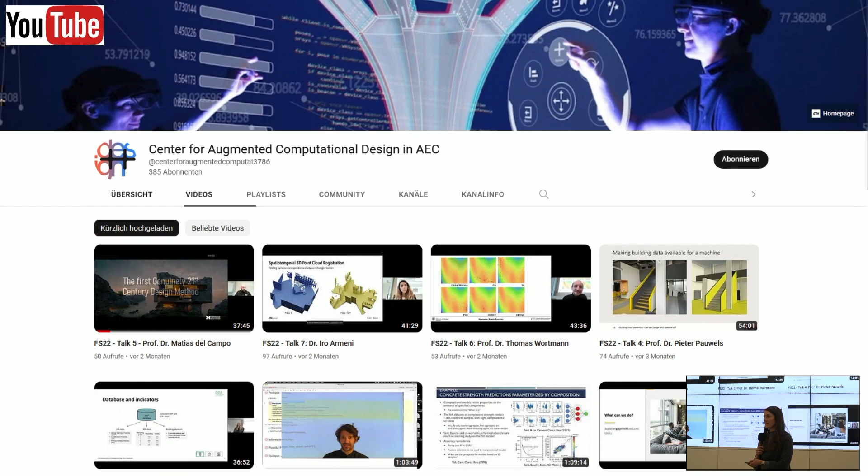There's many nice things to say about these two, but that's maybe not the point of today. The point of today is to introduce our seminar series, and we'll have 4 talks this semester. So we are trying to up the quality and reduce the quantity here. And if in the future you would like to see any of the past or upcoming talks, they will all be recorded and added to our YouTube channel, if it's okay with our speaker. So this is the team who puts together the speaker series. If you have ideas for an upcoming talk, a speaker, an idea, a theme, please let us know, and we're happy to add it. So with that, I will let Vera introduce our speaker today, Professor Eleni.

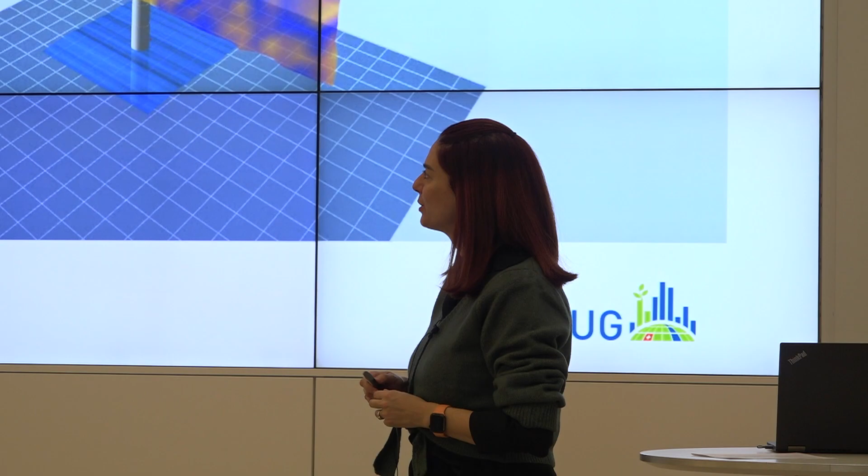Okay, so I would like to introduce a bit of what we do in the Chair of Structural Mechanics and Monitoring at ETH Zurich. I'm also a core faculty member of the ETH AI Center, so it's great that we have Vera joining the center soon with Stelian and Walter. And what I will show here is actually touching on the use of AI and ML methods, but in a way that is interpretable for the purpose of monitoring of engineered systems.

And because I will be discussing monitoring, I would also like to define the so-called concept of structural health monitoring, which is effectively a chain starting from acquisition of data, measured information from different types of engineered systems, for the purpose of diagnosis of their existing condition, or prognosis of their future performance. And a way in which this can be done in an interpretable fashion, and where we come in as a group, is essentially the use of simulation models that can take into account the underlying principles of dynamics, as I will show, but also physics.

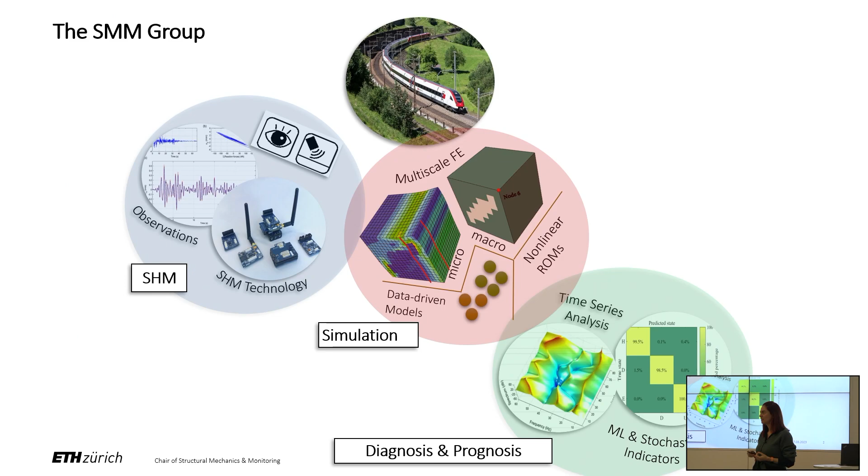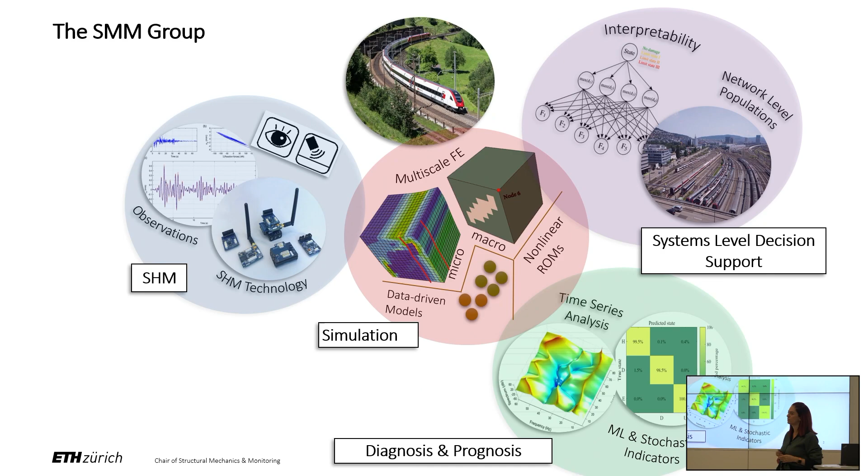And so we do this for assessment of engineered systems as entities, but the overarching goal is to be able to achieve this for the system level when we're discussing populations or fleets of systems, or, for example, components of the structural or infrastructural network of transportation, or wind farms, which is one of the assets that we are typically dealing with, where a decision has to be taken at the collective level.

Okay, so the types of systems that we deal with are not your typical civil engineering structures. Actually, it's also your typical civil engineering structures, but it's anything that can be considered an engineered system and on which we can install sensors and retrieve information. So we work with the Swiss Federal Railways, for example, for the use of onboard monitoring for extracting information on railway assets.

Let me see if the pointer works. Maybe not so good. I'll do it from here.

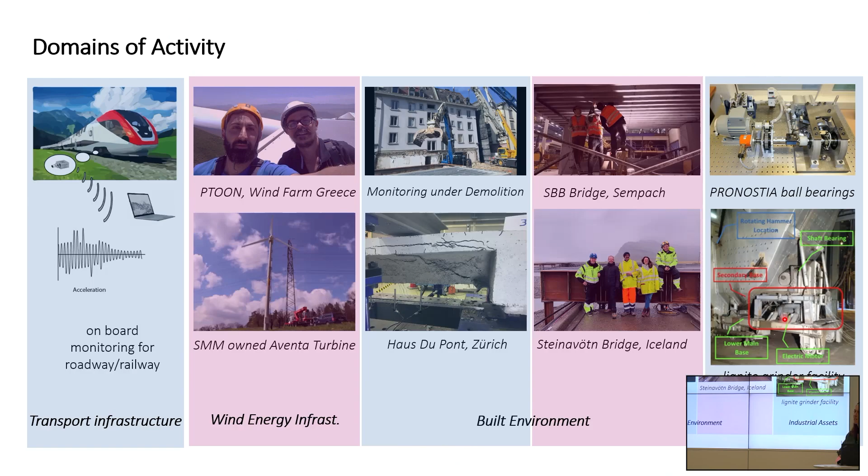And then we also have a number of activities in the domain of wind energy monitoring. I'll come to that in a bit. We do, let's say, more conventional civil structures, but also engineered systems that are actually industrial assets, bearings being one such example. Now, before I explain the use of monitoring in conjunction with models, I would like to explain, as many of you probably already know, what we can do by valorizing data, meaning data on its own.

And to show this, I will use an example from our activities on monitoring on wind farms, where, just to put it in perspective, a lot of information is typically available from so-called SCADA information. This is basically information on the operation of these wind turbine systems collected at the nacelle, which is the top of these turbines, and which can give some idea about the performance of the system and the collective image of what is going on at the farm level.

Now, the issue here is that you can probably understand the interaction of these systems and the way in which wind affects their operation also using physics, but to do that, you would need quite detailed CFD, computational fluid dynamics simulations, which is not always easy to achieve, and it's not very realistic if you have to take a number of assumptions. So here we try to harness the power of data on its own to develop models of the performance of these systems. So basically how wind measured in a single point, a meteorological mast in the farm, would translate into the wind that reaches these individual turbines at a specific site that is being monitored, and how this would then translate into engineering quantities that are of interest for the assessment of these systems.

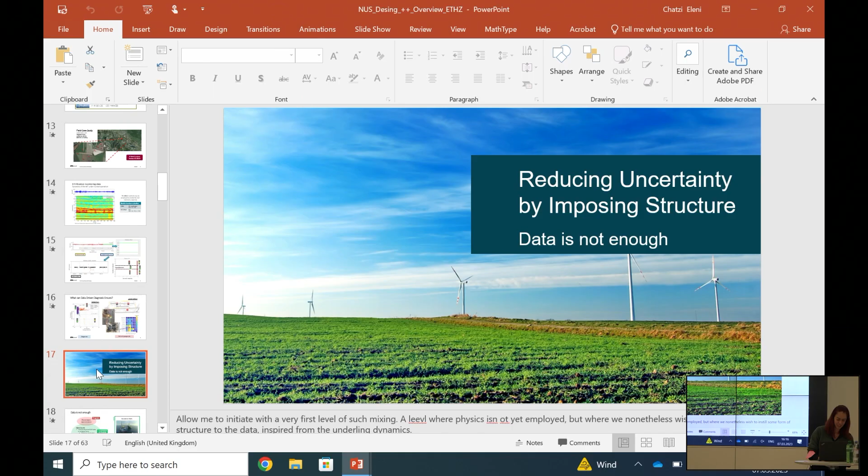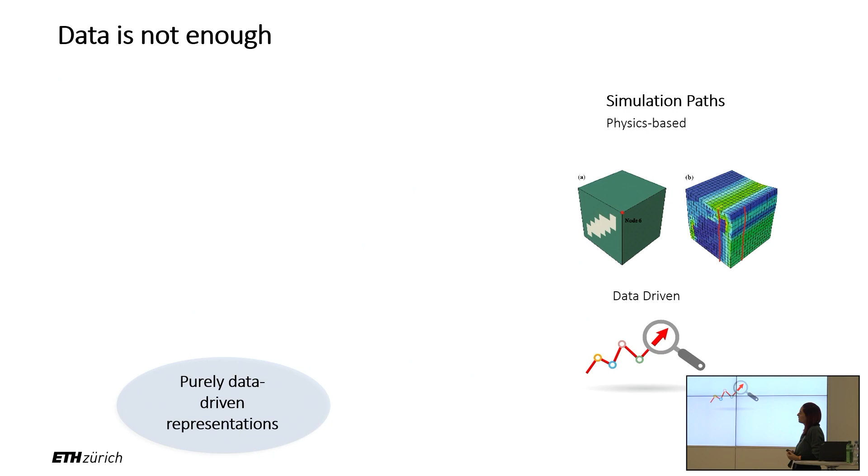When feeling that data is not enough, it means that it's time to bring an extra element in the loop, and this is where we try to use that additional knowledge that may stem from physics. So for purely data-driven representations, I already made the point that you can get to the level of detecting damage, which is the so-called task of diagnosis. But when you want to prognose its performance and how it will perform under different loads or in its future lifetime, then we need to bring a physics connotation into our simulation and predictive modeling approach.

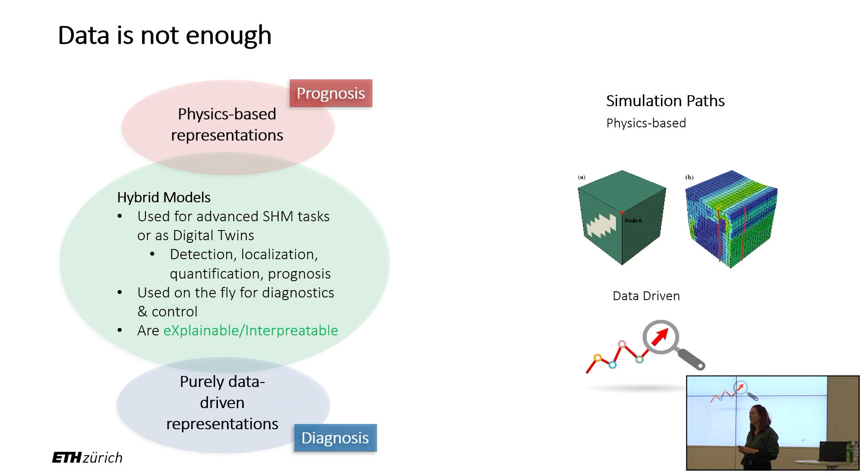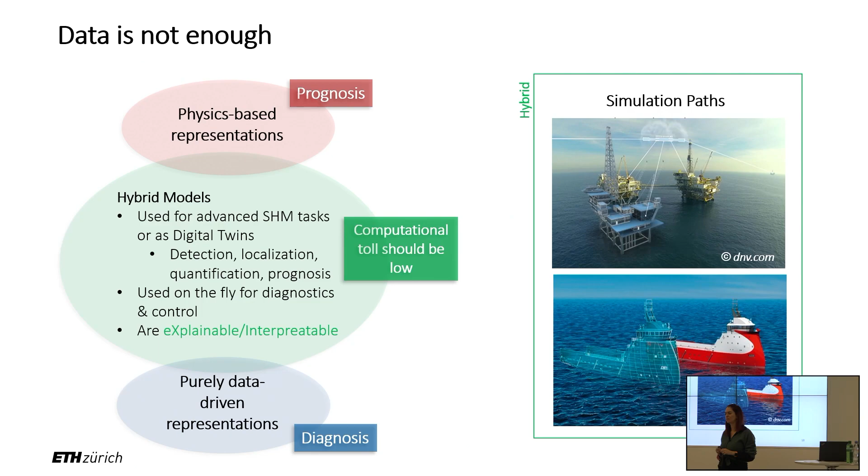This kind of marriage or linkage between data and simulation is what we call hybrid modeling, or you may have heard of it as gray box modeling, and is essentially what we deal with in our chair, a sort of exploitation of the best of both worlds. We try to use these models for purposes of digital twinning, so to extract what we call virtualizations of structural systems, meaning a digital counterpart that can interact with a physical system feasibly in real time. And because we want to do this in real time for different downstream tasks, we have to have a computing capability that is very fast, almost as fast as your data is attained. So we can discuss an online predictive capability.

So a lot of the examples that I will show you next will rely on this kind of online or real-time estimation. But before I do that, I would also like to show you what could be of interest to many of you, which is more of the offline concept, how you can bring together a model and engineering data, not necessarily in a real-time setting, but in a way that exploits physics and some sort of observation. And to do that, I thought it would be meaningful to show you a bit on our AeroSense project, which is a project with the Swiss National Science Foundation, with colleagues from OST and from the Center for Project-Based Learning here at ETH Zurich.

The goal of the project is to develop a new sensing system, which is essentially a foil or a thin skin that incorporates pressure-based measurement sensors. It is wrapped around curved areas. In our case, this is done for monitoring wind turbines, so you can think of it as a sleeve wrapped around different sections of the wind turbine that can monitor pressure. We developed this sensing solution because we would like to understand, first of all, the performance of the wind turbine blade, which is oftentimes a problematic component of wind energy systems. We would like to predict effects such as erosion, the slow degradation of the blade surface, structural deterioration that could indirectly affect these pressure measurements, and eventually possibly infer the wind flow around the turbine, which we can use for simulation at the farm level.

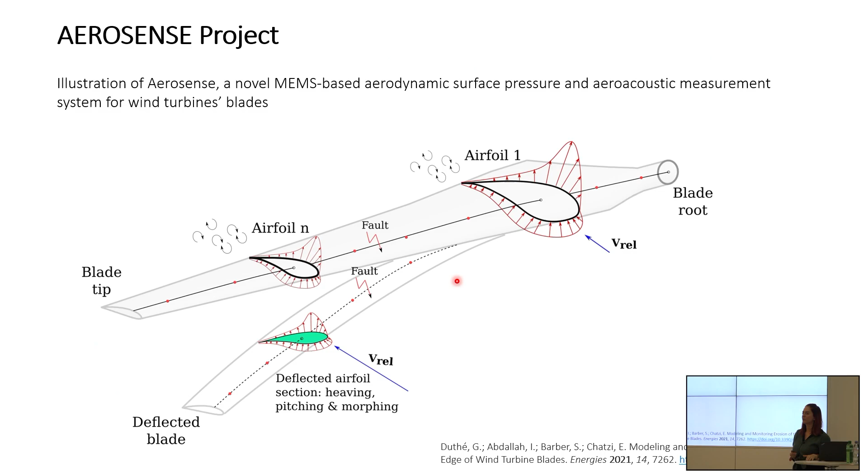So in this case, because the system is very young and we haven't had the chance to install it in several operating wind turbines, we have to resort to the use of a model in order to be able to understand what it could give us in terms of predictive power. And that's actually what we have done as an initiating point.

We have used engineering models of these blades, which we use as emulators of the response of the system. And basically, we use them to generate artificial data that we hope is close to what the system would monitor in the field. Of course, when you use a model that cannot always be a precise representation of the system, this has to be done in a probabilistic way, and that's indeed what we did.

We generated series of operation of these blades under different environments, emulating on the basis of existing literature models what the erosion process would mean for the blade and how it would affect its aerodynamics and pressure. And then we used the sparse information that we get from these foils that are just wrapped around sections of the blade to show that using transformer representation, we can actually pick up meaningful readings and track the eventual deterioration of the system, which is what we would like to implement in the field.

So in this case, the model was there to make up for the missing observations we have, but it's also a means for us to fuse physics into the operation or into the diagnostics of the system.

A more explicit way to understand that is what we did as a next step, where we use the blade section that I showed you before, and we use this information that we get from measurements of pressure around this airfoil, and we try to extrapolate this information in order to recreate the flow around this wind turbine blade, and basically then extract this information to understand the wind flow and the mapping of the wind inside the wind farm, and also then understand how this affects the structural performance of these systems.

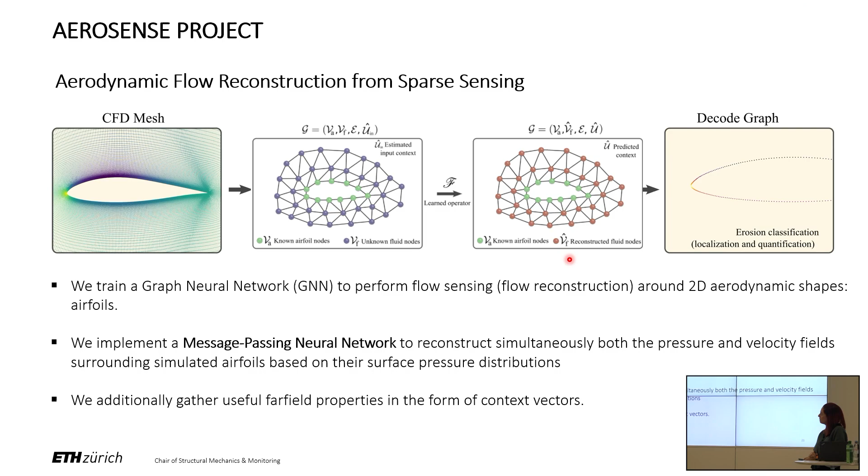So again, there is physics that's generating data on the basis of which a model is trained and eventually is able to give you predictions of the reconstruction of the wind flow around this airfoil in a way that very well approximates at least the baseline that we're simulating. So the idea here is to understand better what we can get with monitoring and to do this in an offline way. But of course, this once again exploits knowledge that comes from physics.

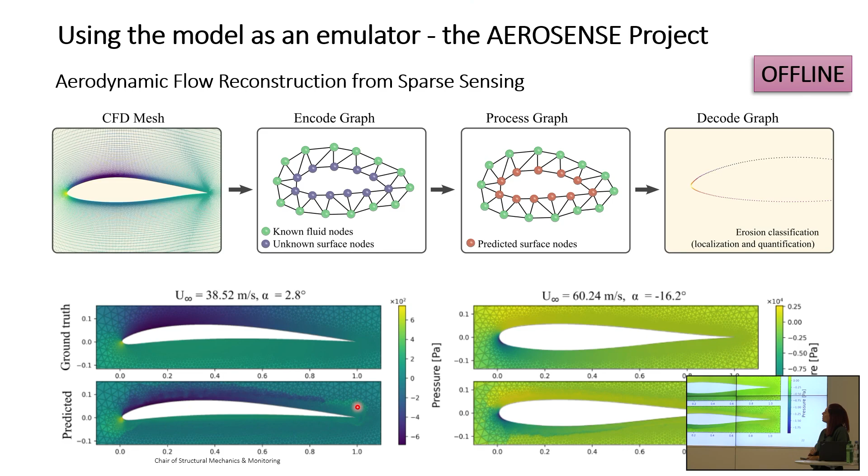However, for a great extent of tasks that have to do with monitoring, this offline kind of approach is not necessarily enough, especially for digital twinning. So when you indeed have a cyber-physical system, a system where the numerical and physical model have to operate in the loop, it's not possible to rely on offline simulations, but rather you would like to have something that is interacting or interfacing with your system on the fly as data is attained.

And so that's what we do in most of the simulations that we focus on, assuming that you have an engineered system that is operating under complex, possibly dynamics, because oftentimes the systems that we monitor are dynamical systems. This is where most of the rich information about structural performance exists, on vibration and dynamics. We also have systems that operate under varying environmental and operational conditions. This is a challenge because this means that the behavior of the system has to be conditioned on external factors. Otherwise, you cannot reliably understand performance.

We have to deal with systems that have distributed excitations. I spoke of wind and wind turbines, but also in buildings, you have similar effects, or you have, for example, bridges that are traversed by traffic, which is a type of excitation that is distributed but never precisely measured. And we have to now try and bring some sort of engineering model and this data in the loop in order to describe the system through its virtual twin.

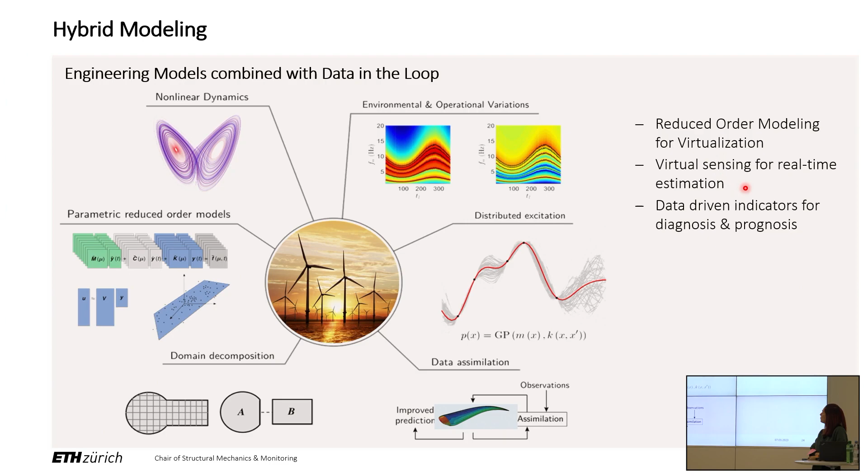There are many reasons why we want to do that. At least in my group, some of these reasons have to do with hybrid testing, which is an experimental exploration of systems where part of the system is in the lab and part of the system is simulated, with actuation applied onto the system through real-time numerical simulation.

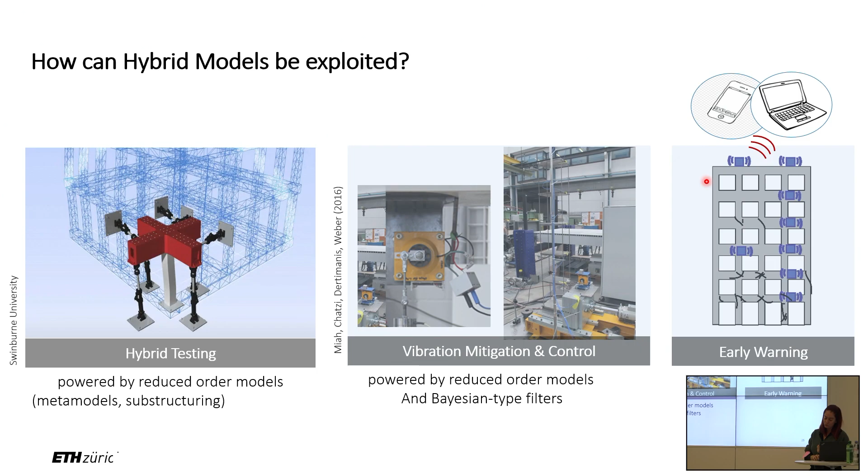We have to do this for purposes of vibration mitigation and control. So in our case, we experiment with solutions of installing damping systems onto structures, typically buildings or bridges, where we try to also extract information from the response of the system in real time and feed it back into the control loop. Again, this has to be done on the fly.

And we also have applications on early warning. Seismic monitoring systems are a very good representation of such a case, where you would like to have smart tagging and labeling of buildings and potential damage soon after an earthquake event occurs. And this is possible through monitoring, as long as the computation can be done fairly fast.

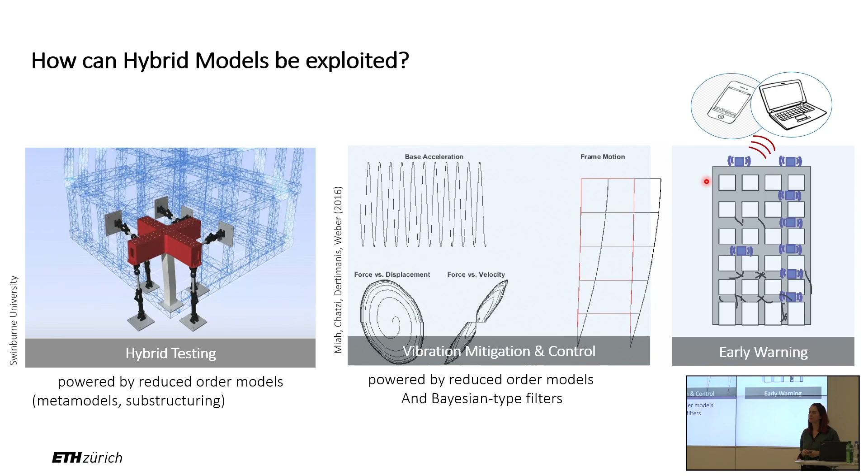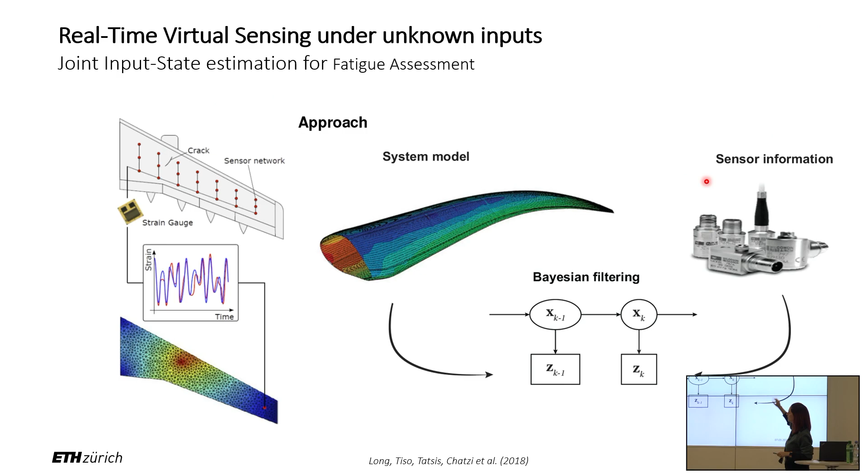So how to bring these two systems in the loop, meaning the physical counterpart, but also the sparse measurements from the actual operating system? The way we follow in our group is a so-called Bayesian formulation. For some of you, this might be a term that you have met in different contexts. The context that we're using it in is the so-called real-time context, where you have a numerical model feeding a prediction of your system, complemented with information that comes from sensors, and at the end of the day offering a prediction that is improved because it can account for possible modeling errors, but also possible noise that could be contaminating the information that comes from sensors.

The principle operates roughly as shown in this diagram, where we have the engineered system. We have some sparse measurements that are extracted by means of the sensing systems we have installed. We usually, as I mentioned, have unknowns. We never perfectly measure loads, so the inputs are not precisely known, and they can also be distributed. And we also have an a priori model that we can set up on the system as engineers, but which is never perfect.

And I assume you probably have come to terms with this reality, since many of you deal with experimentation, and a prediction is never precisely describing the outcome you obtain. So there are unknown parameters, most likely, in the models that we set up as engineers. And we have to deal with all of that and fuse it in a way that can offer us an improved prediction on the output of the system. And by output, I mean a quantity of interest.

A quantity of interest could be, for example, the strain in a critical location that is not being measured, the deformation of the system in its full field, and anything that is essentially virtually sensed information, where virtual sensors imply the extraction of the response of the system in unmeasured locations. A digital twin is heavily relying on such a concept, because when we monitor a system, we typically want to know more than just the bare minimum of what we observe. And the glue to making this happen is the physics-based model.

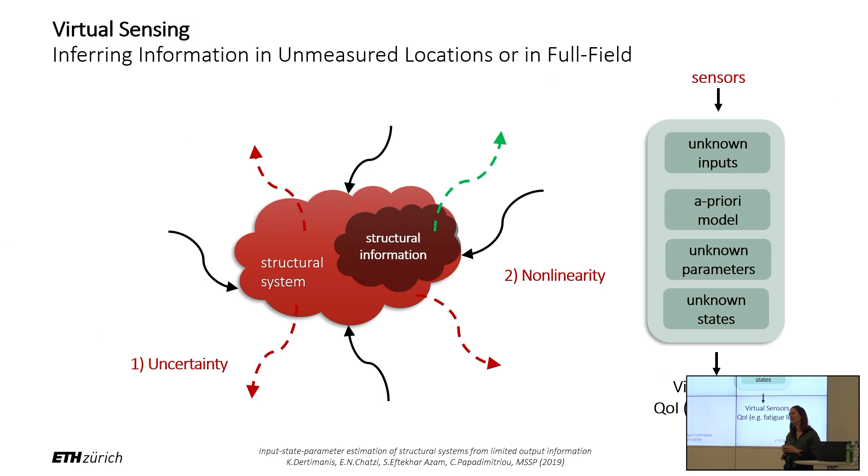But there's a number of challenges that come into play when you're trying to conduct such an inference. The first one being the uncertainty that exists in all of the aspects I describe here. The model is never perfect. The sensors are never noise-free. They're usually few and sparse. Systems are not always behaving nicely. If you're dealing with thin shell structures, for example, there's likely nonlinearity there that is not very easy to model with conventional means.

The observations we have are usually from low-cost systems that could be more and more numerous, but are always finite in number. And there's further the large dimensionality, which is really the curse of real structures. They're not nicely behaving simplified systems, but more complex, and described by a large number of degrees of freedom. In our group, we deal with structural mechanics. This is actually a topic we teach. And traditionally, structural mechanics has always been concerned with how to simulate actual structures, so multi-degree of freedom systems, in a way that is computationally efficient.

In the slide, I'm accumulating some of the typical approaches to doing this, and there exist ways to accelerate simulation with easy, let's say, not tricks, but ways to reduce the modeling of the system into something that computes faster. We can do this for fracture. We use extended finite element methods to simulate the systems that are cracked and do it in a cost-efficient way.

We can do it for nonlinearity or material plasticity. Again, there are multi-scale formulations that allow you to compute something that is a nonlinear structure in a faster way. We can do it with substructuring when we're dealing with systems that are sub-assemblies or comprising assemblies of multiple components, like wind turbines, for example. And we can also compute faster for systems that experience geometric nonlinearity, like those thin shell structures.

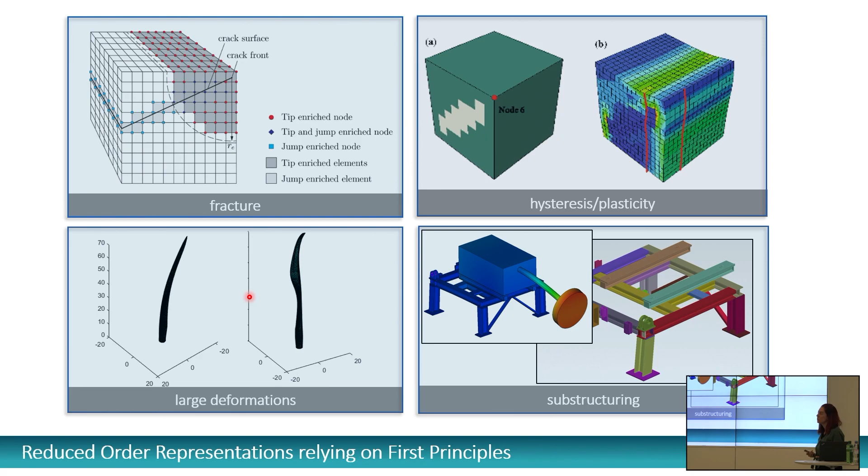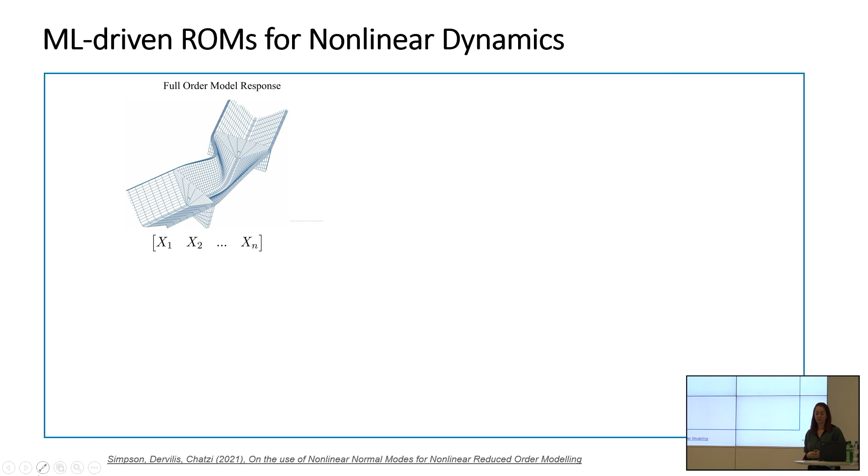But a lot of these ways, although they can be computationally faster, they're never fast enough to allow us computation in fragments of seconds, which is how fast our data is accumulated. So we need to do better than that. And one way to boost this kind of a computation is to use a machine learning type of approach where you try to develop a surrogate of what we would call a full order finite element model by replacing it with an alternative that computes faster.

Such an alternative can be given by an autoencoder setup, or specifically a variational autoencoder setup, and I will explain later why, which can admit simulations of the response of such an expensive system and boil them down into few representative parameters, even if the system is actually nonlinear in behavior. And because we have to simulate dynamics, you can actually link this reduced latent state space with recurrent neural networks.

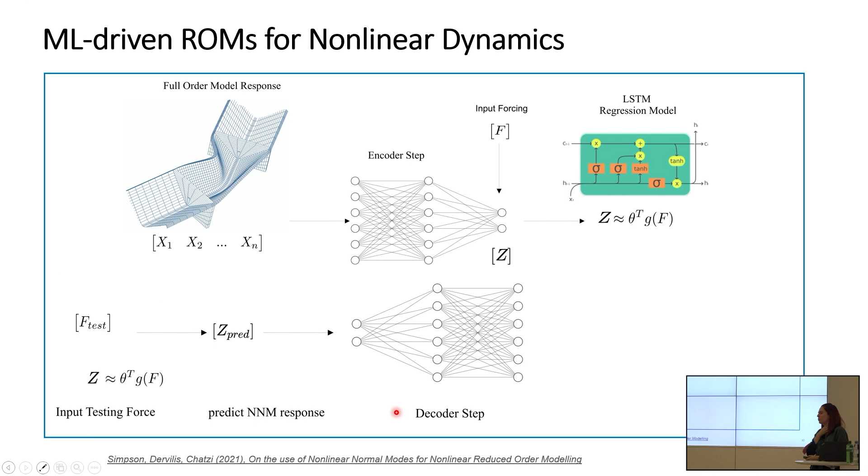In this case, we use an LSTM, where we can link the force that comes into the system at each fraction of time that we have data, solve our equations in this reduced space, which is non-physical, but we don't actually care, because once we understand the response in this reduced space at the next point in time, we can use the decoder to go back into our physical space. This is very important, because in monitoring, we monitor actual physical coordinates, so it would not mean much to simply stay in this reduced dynamics.

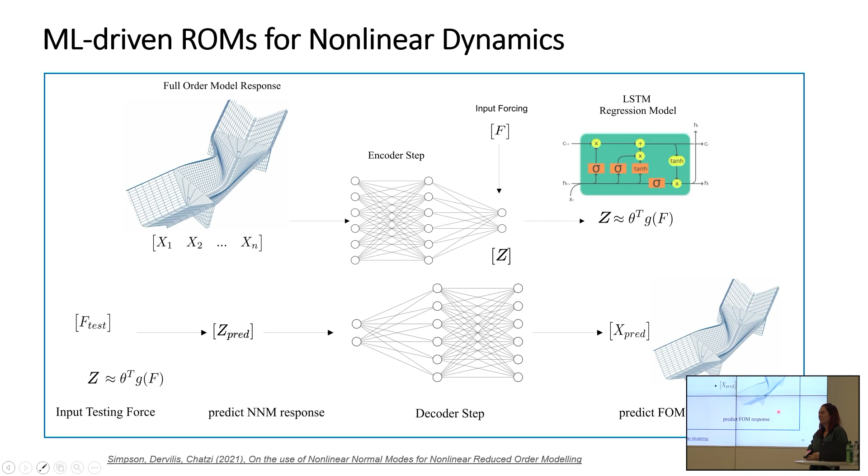But in fact, we can recover any quantity of interest from a finite element model by using this decoder architecture. We have validated this approach first on a benchmark that we have set up for the structural engineering community, offered in the platform for the nonlinear benchmark workshop. This is a nonlinear plastic system. It's a shear frame where every node is a hysteretic link, meaning a connection with hysteretic nonlinear behavior. And this is a multi-degree of freedom system.

We have validated this also on experimental data from such a shear frame with nonlinear mechanisms. For those interested, the variational autoencoder makes a difference, because it extracts a latent state that has, not orthogonal, but independent components, which means you're trying to approximate what we call in structural engineering nonlinear normal modes, which is particularly important for nonlinear systems.

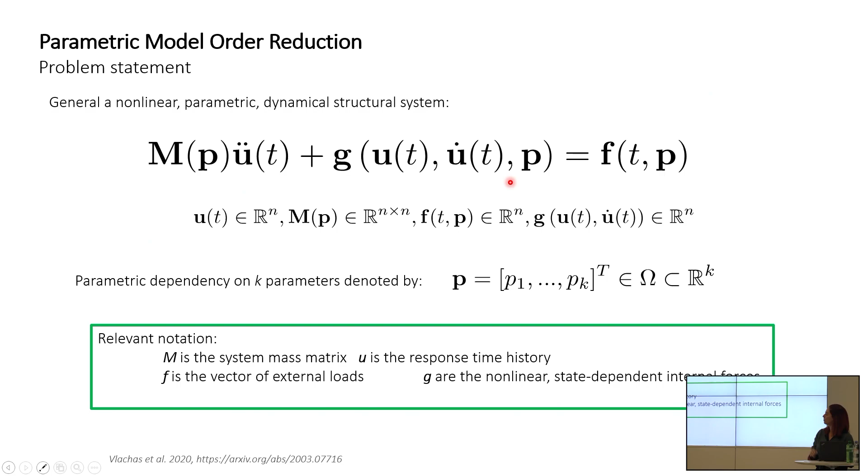In this case, again, we're concerned with the dynamics. For those who have a structural engineering background, dynamics is actually typically represented by such an equation. And what we would like to do is replace this expensive simulation that's usually done with finite elements, again, with something that computes faster, but is this time conditioned on a set of parameters like material or geometric parameters, or parameters of the loading that is acting on the system. We do this using a Galerkin-based projection approach.

And I don't want to go into the theory of this, but I would like to explain that it's something that can be easily extracted from numerical simulations again. So you use your model, or full order model, as an emulator. You generate the response of the system under different sets of parameters. And when you do that, essentially a singular value decomposition on those response time histories would then give you these basis matrices that can take us from an n-dimensional space, which is quite large, into an r-dimensional state. So a representation that's very compact, and it gets, again, much easier to solve. And this representation is conditioned on our parametric space.

So assuming we have an equation that describes the dynamics, or a model that describes the dynamics and is a reduced order model, and assuming we have an equation that is reflecting our measurements, we can now bring the two together using the Bayesian logic that I mentioned before. And the Bayesian logic is basically a two-step procedure. It's a procedure where we have a first step of prediction, and this prediction step is what the model tells us. We use the model to predict where we are at the next point in time.

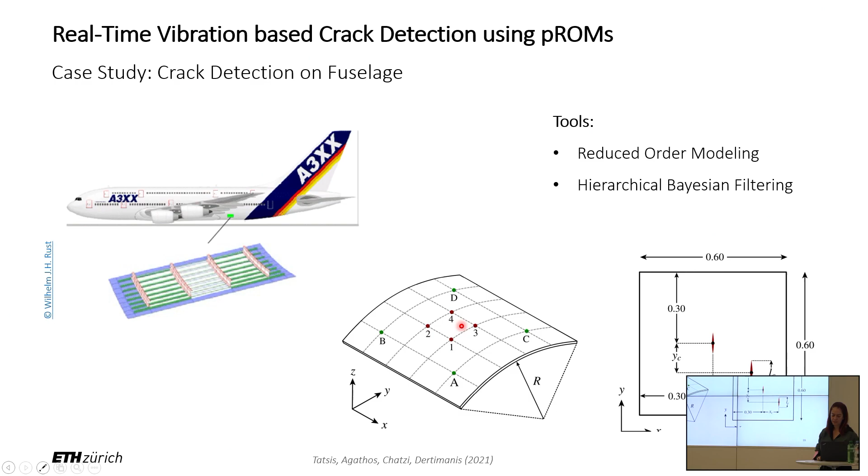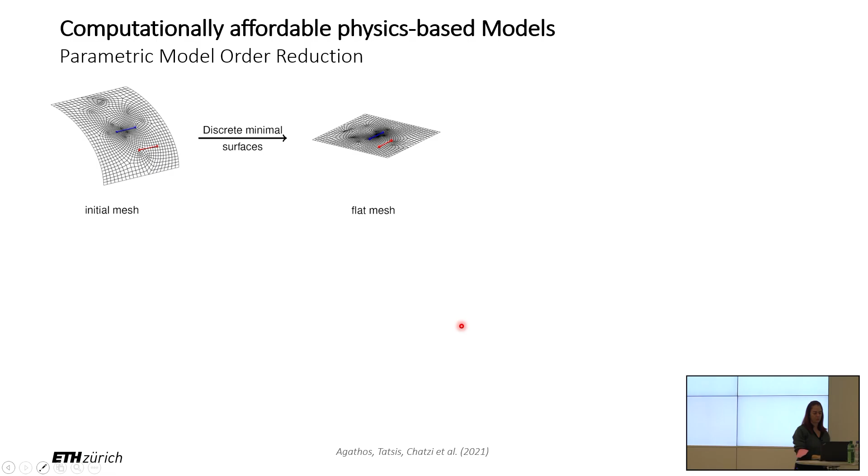So we do use the logic that I showed earlier. We develop a reduced order model that's conditioned on the parameters of the problem. In this case, for damage detection, the parameters of the problem are the location, orientation of the crack, possibly characteristics of the load that is exerted on the system. And so what we do is we take this curved surface. We generate a number of different flaws that we use to generate simulations from. We encode these flaws, which are basically these cracks, by using a mesh morphing approach. It's a bit more detailed, and I leave it there for those that have an interest in structural simulation, but we can come to it maybe later if you have questions.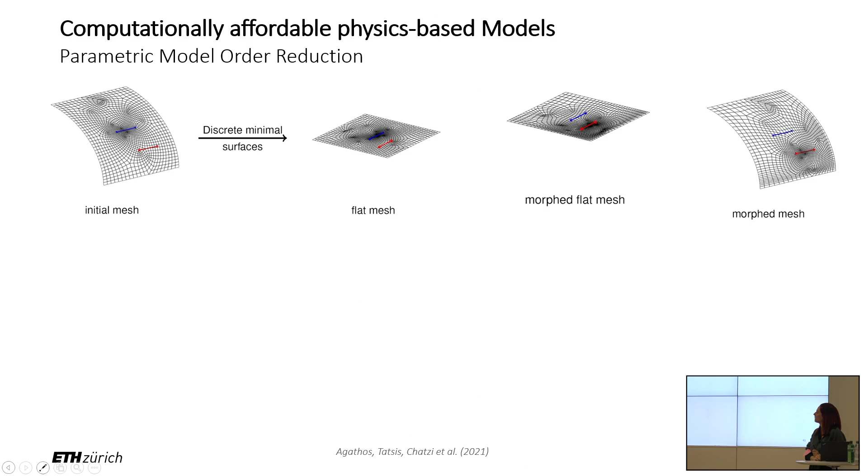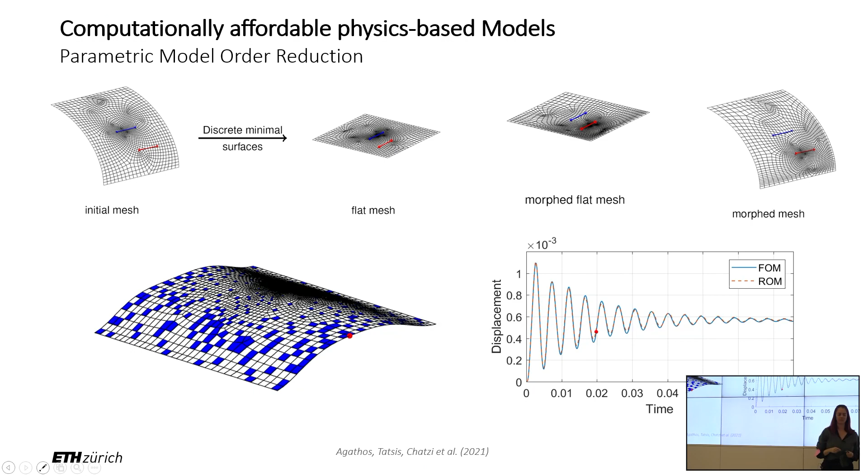But the important thing for us is that we can have a model that computes actually faster than the video that I'm showing here, and which can give us the response of the system as fast as data comes in. And now that we have this, we can combine the data, the so-called observations, the measurements from that fuselage panel that are usually in the form of accelerations or dynamic strains. We run a series of models in the loop together with this data just because they're fast enough to compute.

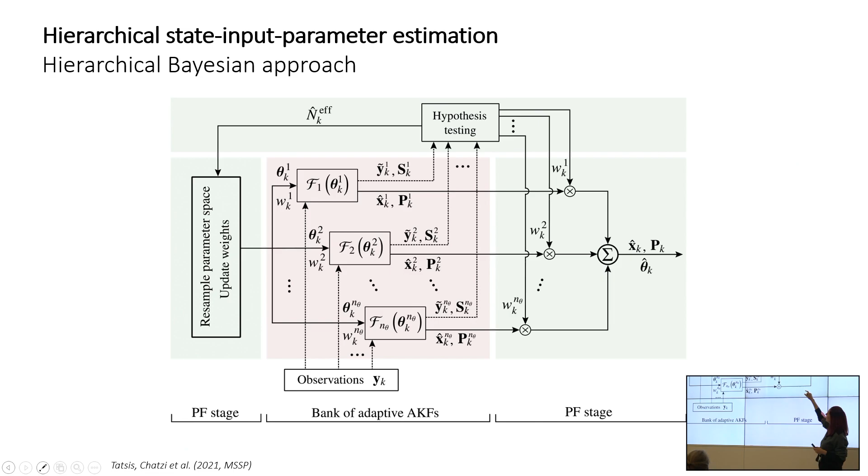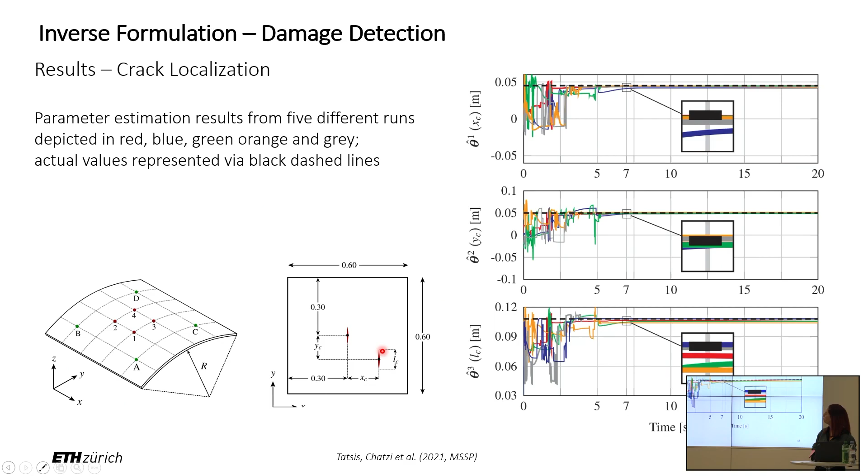And on the basis of a model selection process, we can infer what the likely parameters for the crack positioning or multiple crack positions are, which is something that you see here as the convergence. This convergence is done as we acquire data, so as the system is actually operating. But also, quite importantly for us, we can extract the response of the system in locations that we don't measure with quite high fidelity, of course with some level of uncertainty.

And we can do it at a significantly faster computation than even the most improved or highly developed full order structural models would give. So in this case, the speed up is 177 times with respect to a finite element approach.

Now, in what I showed, and that's probably what I would soon like to close with, I assumed we have a model, I assumed we have data, and we're trying to optimally combine them. But I didn't say much about the case where the model could be significantly off. And for anyone who uses real observations and actual experiments, you might have seen that we can never have a model that is good enough to really approximate what we observe.

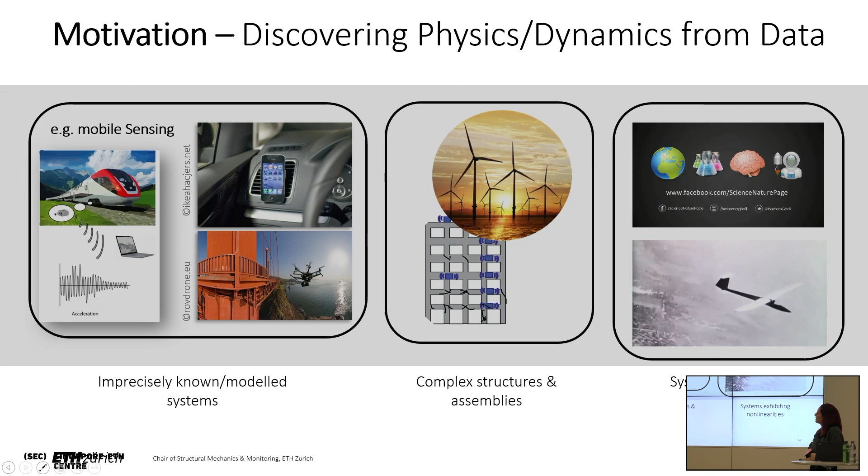And that's the case for many of the systems that we deal with, that have to do with monitoring, either using remote or attached means. They have to do with seismic evaluation of structures. They have to do with dynamics of systems that are highly flexible or highly deformable. So because our models are never precise enough, we have to find a way to compensate for them, but a way that does not necessitate the pure use of data or the blind use of black box machine learning methods. Because at the end of the day, we're still engineers. We have an idea on how our systems operate, and we would like to take that into account.

In our case, the motivation for developing something like this came from our work in Singapore in the Future Resilient Systems program. There, we're developing an onboard monitoring platform where we attach sensors on vehicles, similarly to what we do with the federal railways. But in that case, we want to have a low-cost platform, something that we have developed, and it's easy at this point to produce at relatively low effort.

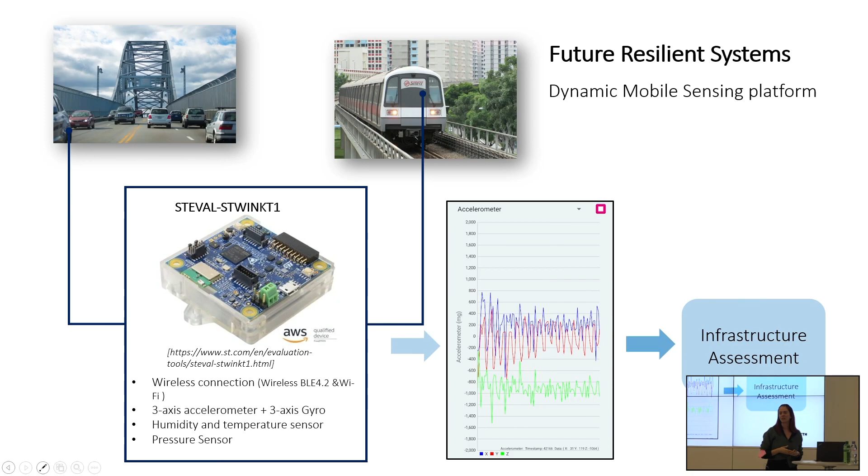And we would like to take the measured data that come from such traversing vehicles and use it for assessing the underlying infrastructure. We want to do that because by using mobile sensors, you can assess large pieces of infrastructure, kilometers of roads or rails, with a single diagnostic vehicle or even your common cars and common operational trains.

So when doing that, we realize we can never have a perfect model of a system that is probably quite complex. But we do have a basic idea of how vehicles generally operate. Even the developers of vehicles have some models that can be used as simplified approximations. And so we use the logic that I mentioned before. We take our engineering model, feasibly we reduce it, but we admit that it is only partially correct. So in parallel, we also run a learning-based model, a model that is taken on by neural networks. For other researchers in the field, this is done with Gaussian processes.

And we try to superimpose the two and marry them using the Bayesian logic that I showed you before, but now for neural networks, marry the observed data with this concatenation of a known and a learned model. The fusion of the two allows us to get a best fitting approximation that still understands some physics, but also accounts for the fact that we do not know all of it.

So here's what it looks like for our onboard monitoring problem. What we basically did is we tampered with the architecture of the so-called deep Markov model. The deep Markov model is a Bayesian filter, which basically follows the logic that I showed before, a step of prediction and a step of updating.

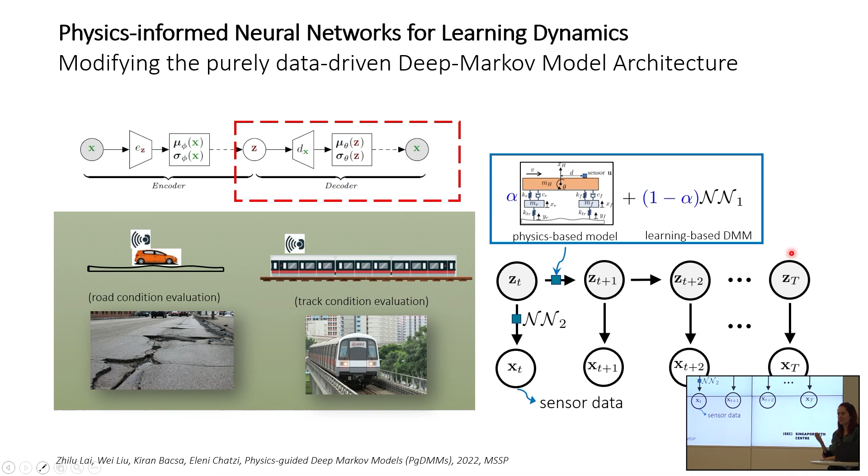So here is the updating based on the sensor data. Here is the prediction based on a neural network concatenated with a physics-based term. All of them operate with some assumption on probabilistic uncertainty underlying these predictions. And when you combine the two together, it turns out that you can estimate quantities such as, for example, the roughness of a pavement. Pavement is the surface of the road.

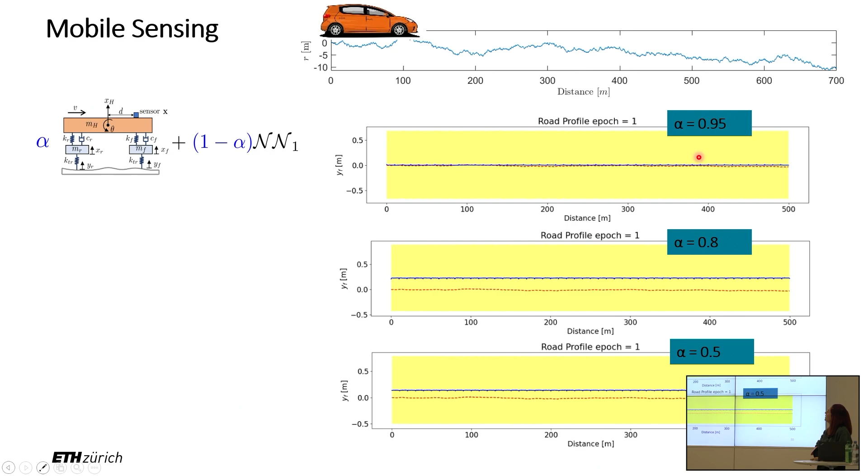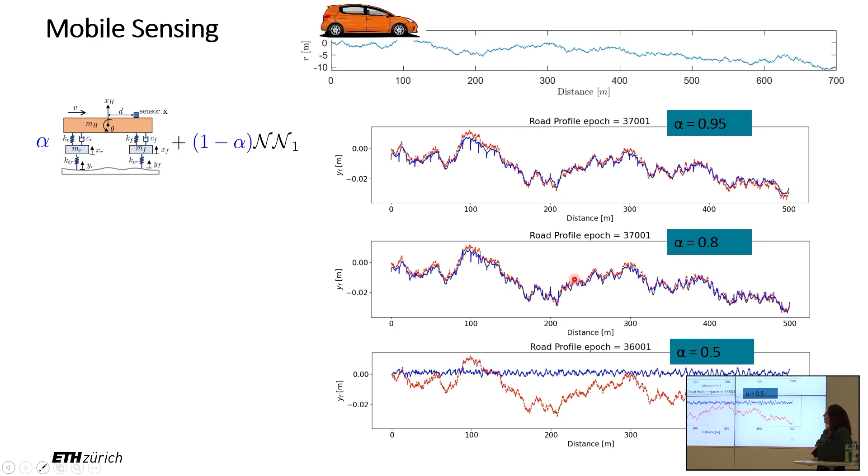When you get acceleration measurements from a vehicle, I show you here how the mixing works by forcing the weighting term between the two models. This is not something we do. Actually, this is inferred. But I want to show how the behavior would operate. In the case where you rely more on the physics, you would get a slow convergence in this case. When you rely more equally on data and physics, you get something that's really not meaningful. But there's an optimal coefficient that gets you into a very good prediction in a short amount of time.

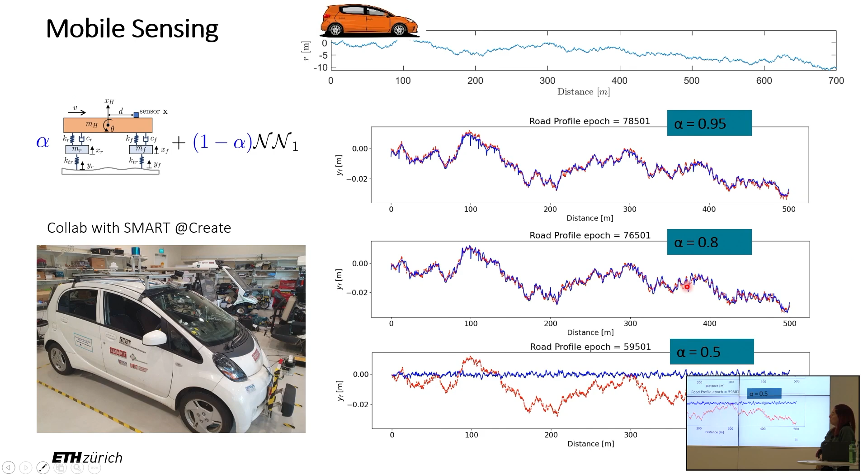We're actually using this logic with sensors mounted on a SMART vehicle. Access is offered to us by the MIT collaborators we have on the campus in Singapore. And we're trying to use it for assessment of roads, but also exploit this logic for further applications. I will try to skip this example and take you here to show you that this idea of including physics is highly beneficial, and we have been exploring it beyond the previous application that I showed you, which was on the physics-guided deep Markov model.

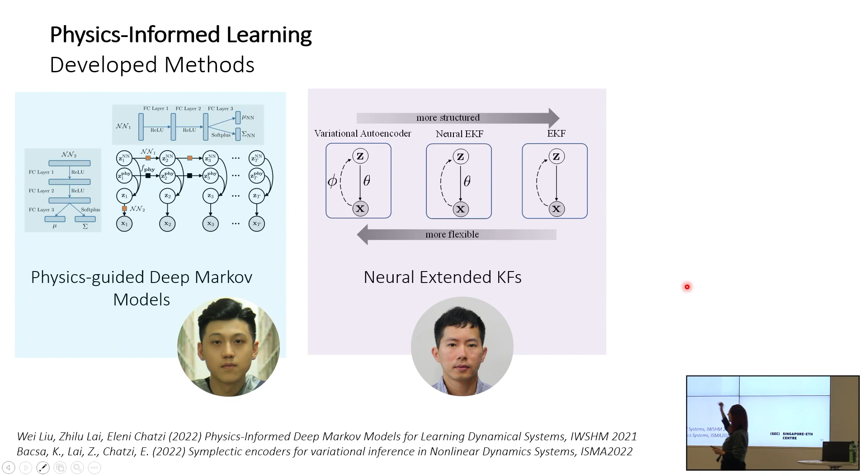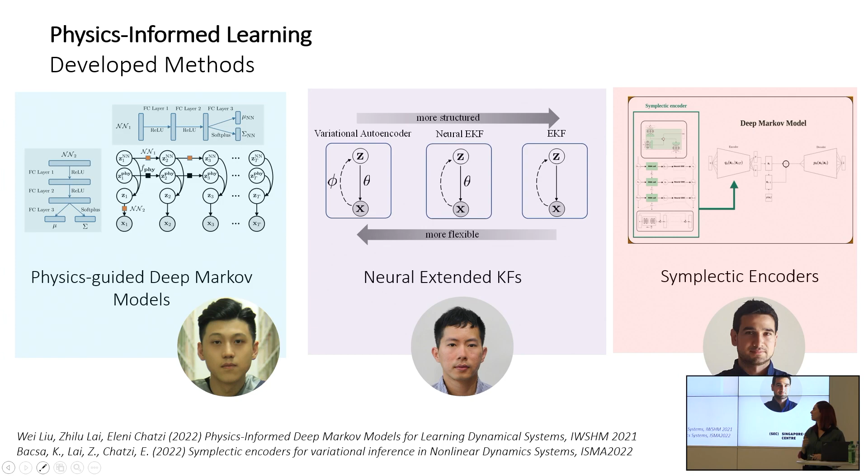We also work on so-called neural extended Kalman filters. Again, it's a way to bring in structure and some idea on the physics of the quantity that you observe into the simulation. And the symplectic encoders, which are basically Hamiltonian neural networks. It's a way to include physics constraints into the prediction of dynamical systems that are actually physical. The reason for doing this, as always for us in monitoring, is to be able to understand how a system performs and feasibly understand if there is damage that is inflicting the system.

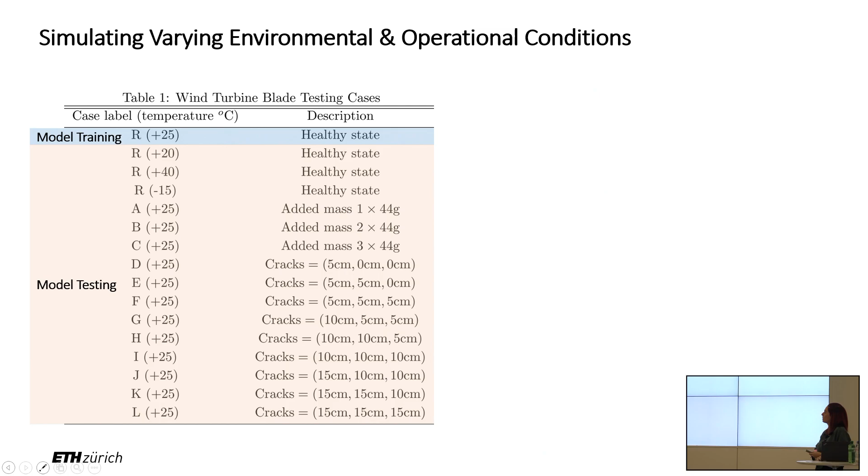We have validated this on an experimental application using a blade that we have tested here in the IBK lab. We have tested this blade under damage scenarios. We have generated different flaws that are characteristic and occur on these systems. We have attached a network of sensors, and we would like to understand if we can simulate the system and then understand if damage occurs under different temperature and under different environmental conditions. That's why we tested it in a climatic chamber. And indeed, we did this.

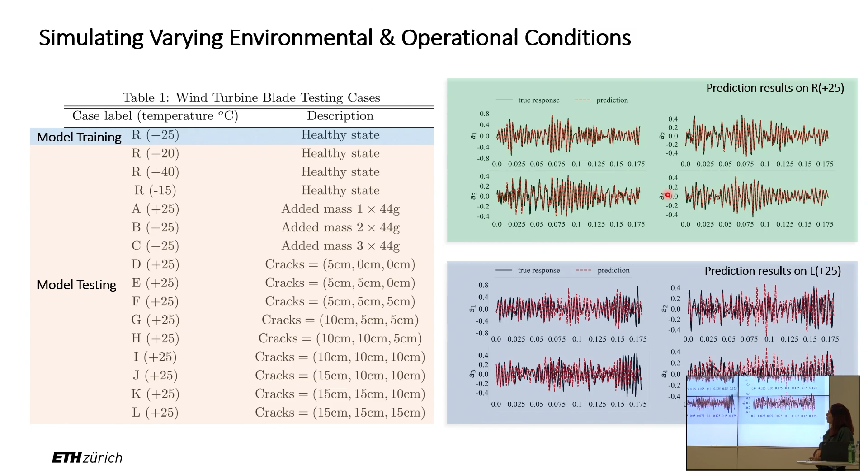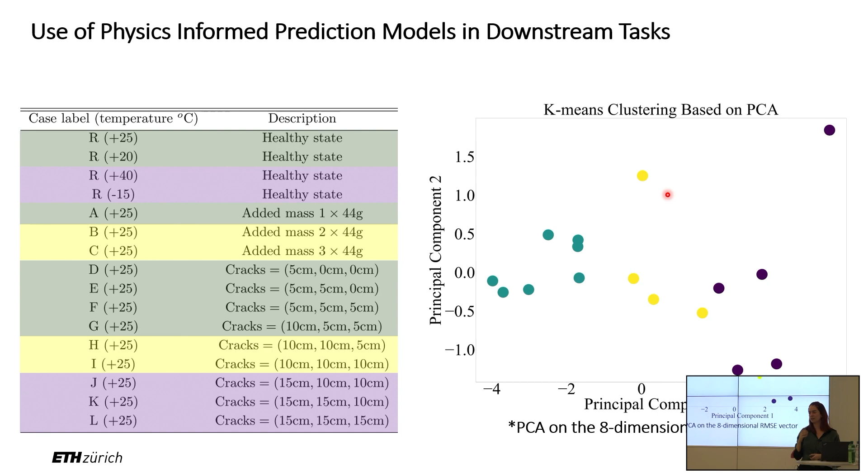We used the logic that I showed you previously, and we trained our model under so-called baseline or healthy conditions. In this case, we have a very good prediction of the dynamics of the system after the first training. But of course, when we go into the other cases where damage comes or different environments are acting, we start deviating. And we're using this sort of discrepancy between what we predict and what we measure to classify the damage and even try to characterize it for different levels of intensity, which is one of the primary tasks of SHM or monitoring, to detect, quantify, and physically localize damage.

And then I want to close with, after following the logic of the chain that I showed you in the beginning, what would come next and how would we be able to go to the last stage, which was decision support at the system level. To do this, we're exploiting a logic that capitalizes on the condition indicators that we extract from monitoring, and which tries to map these condition indicators into spaces of decision on what action to take on a system.

Such as, for example, for a bridge, in case of a specific indication of the condition of the system, what would be the best action to take to repair components that are faulty. For example, for a bridge system, in this case, we were experimenting with cases of joints where you're wondering whether to weld a defective joint, to possibly paint over a corroded part of the system, or completely repair it.

Each one of these actions comes with a different cost and a different effect on the condition of the system after it has been repaired or interfered with. And additionally, another decision to take is what kind of inspection should I then take onto this system to understand where my condition is.

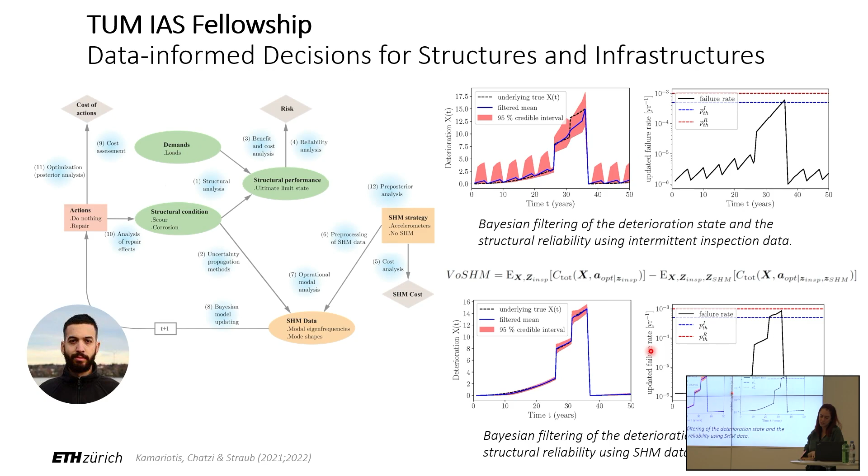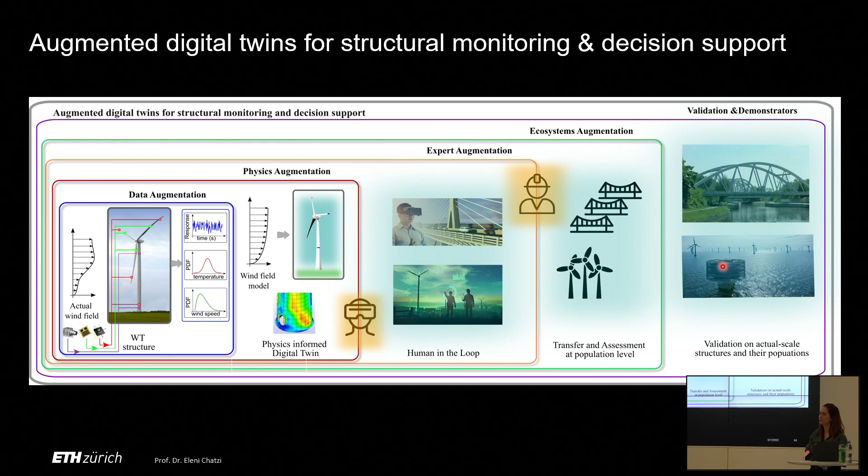At the end of the day, what we would like to have is what the title of the talk was hinting at, which is essentially this concept of an augmented twin, where you have a physics-based model, possibly reduced, running with data that you extract from the field, complemented with information that comes from experts and from their tendency to take and assume decisions, and transfer this to actual scale systems that tend to not be individual structures, but rather fleets or populations of structures.

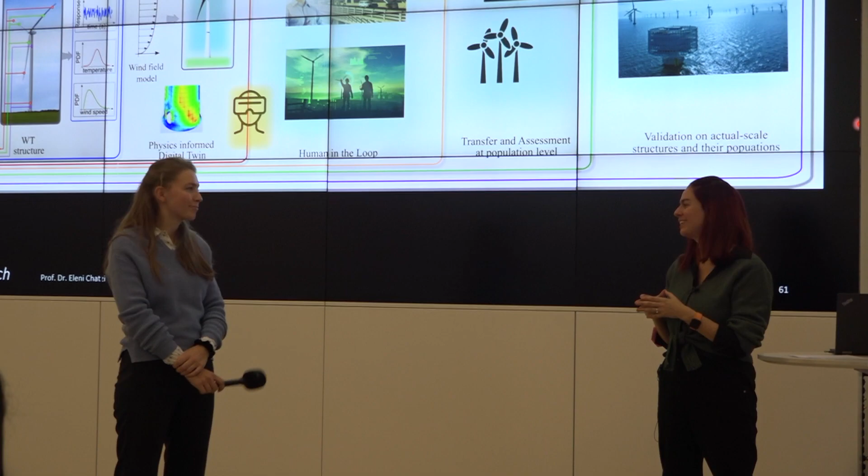The benefit of fusing even this partial physics-based information is that you recover a fitted function whose states are actually closer to physical states. And you get information that is more than the information you probably observe that still has a physics-based connotation. So they are explainable.

And that's why at the end of the day, for us it's important, because then we can show it to the operators and the engineers who have to decide, and it's not a black box function. It's probably a displacement or a strain or something they care about that we presented. Thank you very much for elaborating.

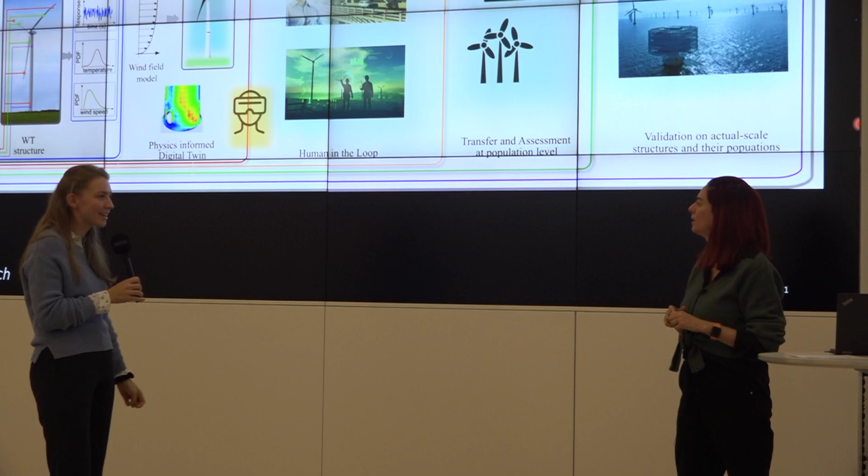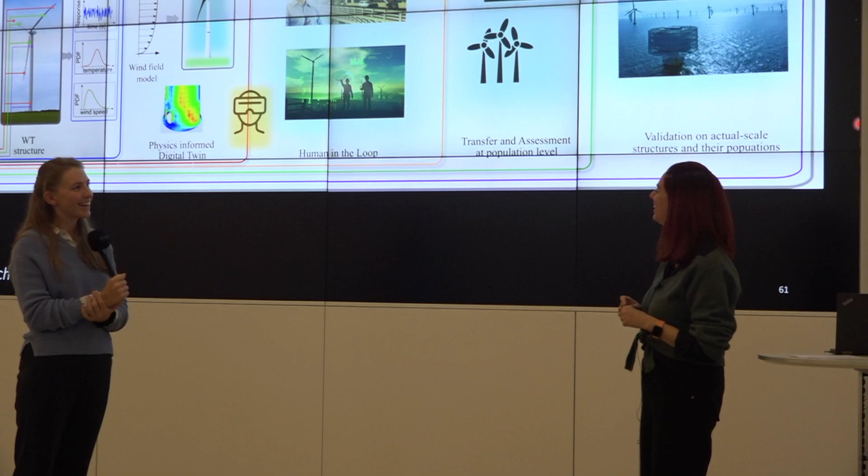Yeah. And maybe there is also a person here wearing virtual reality glasses. So maybe to break it down a little bit in more simple terms, how would you imagine to show this to a person that doesn't know how to? This is a good point. I'm using this graphic. It's actually a graphic that we have submitted for a proposal because this is something we're working on with colleagues and we would like to see it soon materializing.

The idea would be to take exactly the framework that I showed and indeed bring it in what we call a virtualization to the engineers, to the operators, again, the decision makers. In my opinion, the most prominent way to do this is to offer a visualization that is interpretable for them. And you likely know, and I think it's part of the Design++ even, to use this kind of technologies,

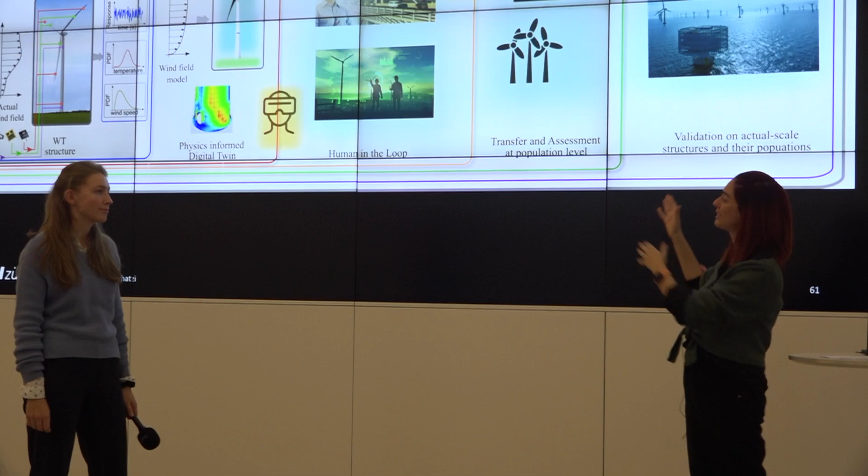that you could use augmented reality to deliver the simulation that we're predicting, for example, through our fused models, and overlay it over a physical system, or just give it to the engineer to actually visualize the prediction of the quantities that we offer, not as time series data, but an actual deflection of a blade. This is something we do actually with Siemens.

They already have produced such a virtual reality platform that can give you the deflection of a blade under different wind loads, allowing the engineers to consider what the design means in that case, or if it's an operating system, to understand whether it's actually being fatigued or if it's being loaded more or beyond the expected performance. And I think that's really something we will be certainly doing in the future.

It's probably a better way. It gives us a vocabulary, a language that is understood by practitioners and that doesn't just stay in academic plots and figures. So I think it's quite important. Thank you very much for your elaboration.

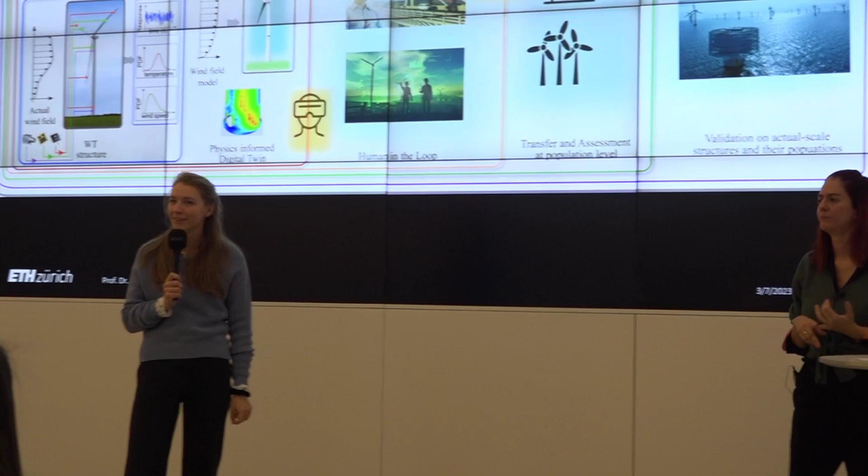Are there now any more questions from the audience? Yes? Thanks for the presentation. And I was wondering, why am I so loud? The models that you have from one structure, for example, if you take measurements in one bridge, how does it actually extend to another one and that typology?

You're right. This is one of our biggest concerns, how to do transfer between systems that are similar or even systems that are not necessarily similar. For example, in a paper with collaborators from the University of Sheffield on what we call population-based SHM, the idea is to show how damage detection performed on an airplane blade could relate to damage detection on a frame structure, on a building structure, for example.

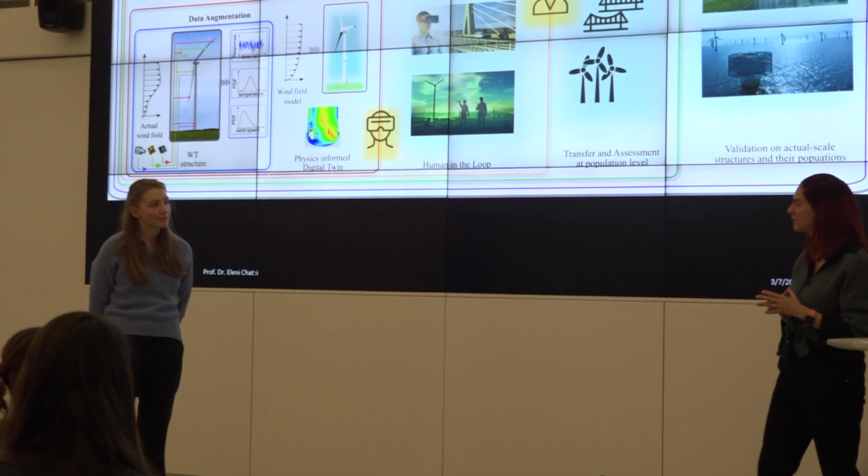The systems are dissimilar, but the traits of the dynamics and how these change between interconnected degrees of freedom actually prove to be more similar than we expected. So there is the possibility of transfer, and a very good way to achieve such transferable and generalizable models, in my opinion, is to use graph-based representations.

So for example, when you reimagine a structural mesh as a graph neural network whose attributes reflect the stiffness and whose nodes reflect the interconnection of structural elements, then by redefining these attributes and even the geometry, and we have such a case for simulation of wind turbines, you can reimagine these grids, which give you either a new structure or in our case a new wind farm layout, and you can adapt that model that was previously trained for another configuration to still perform on either a different geometry or even a new structure altogether.

This is imaginable, but in order for this to be done, you have to have a representation that really reflects the aspects of those systems that are common and allows you to parameterize with respect to those aspects that, of course, are changing. And there's limits to this, but to go into the details of this, one would have to start talking about observability of these systems based on what you observe with your sensors, how you model them, and so forth. But it is doable. It's very exciting. It's an exciting direction.

Okay, thank you for your question as well, Danielle. Thank you very much, also from my side.

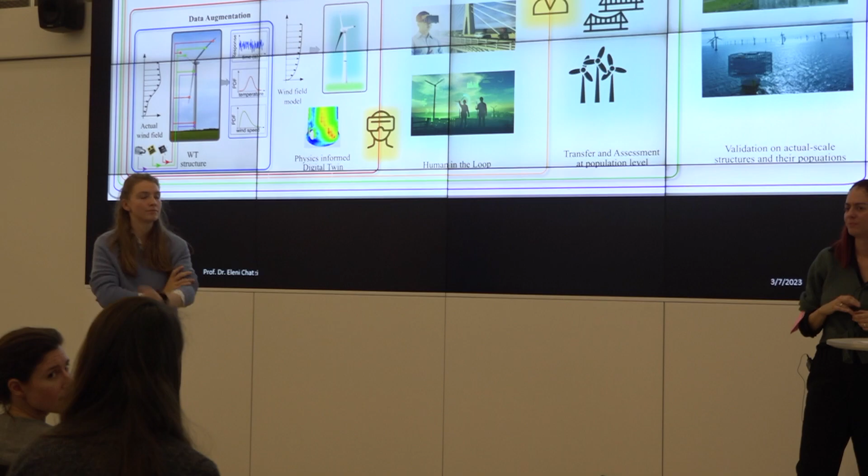And a question which I had: is the same approach or a similar approach transferable also to design? Yes. Design is the case that would be for us what we call the open loop case. You don't have data from the operating system, but many of the aspects that I showed in the beginning were using a full order model as the system that generates data.

So in that case, in design, we usually want to be able to produce these fast representations that are parameterizable and that can replace very expensive computations, because usually for structural systems, a proper design could mean the use of a finite element model that could take hours to run, and to do this over different geometries, different properties of the model, could be computationally unaffordable to the point where it's limiting the simulations that you can achieve and the type of design conclusions that you can reach.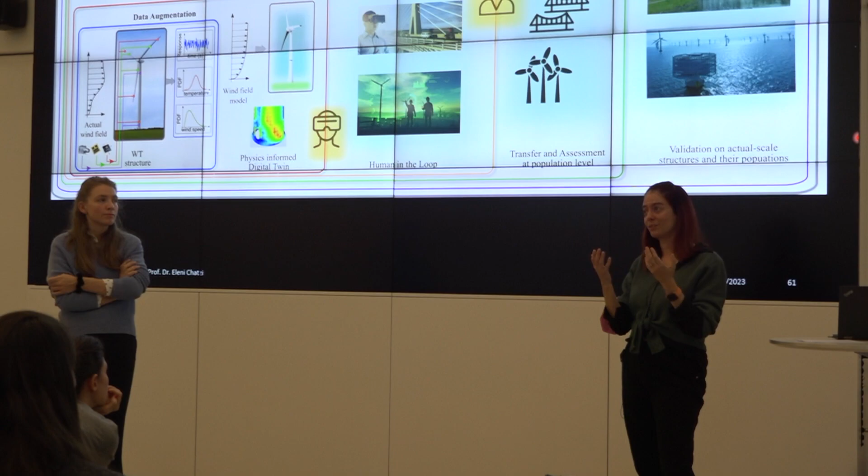So the aspect of reduction by training on data that come from simulations is definitely something that we are also using and that can be used to get these accelerated or reduced order representations that are parameterized and can be reconfigured to run for different material properties, different load properties, so you can, in a way, adapt to new domains. You could even transfer to geometries that are different.

Again, using this concept of graph neural networks, you can imagine having a specific type of design for a roof by reconfiguring the positioning of the nodes in that network, but having already trained for different constellations of these configurations, you can probably generate designs that have not been included in your training. All of this logic is underlying in what I showed you here. The difference is that our primary purpose in monitoring is, at the end of the day, to also combine it with data that we can extract.

And I think that also for design, this is in a sense meaningful, because also here, and I think the architectural department here probably takes pride on this, a lot of the design is complemented with experimentation. And experimentation is another form of monitoring. It's not monitoring an operating system in the field, but it's actually tracking the response of a prototype that is experimentally tested. And so again there, for example, you could have an underlying model of the system, you can test it in the lab, and you can figure out what it is you're missing by using the logic that I showed you before on modeling discrepancy, for example.

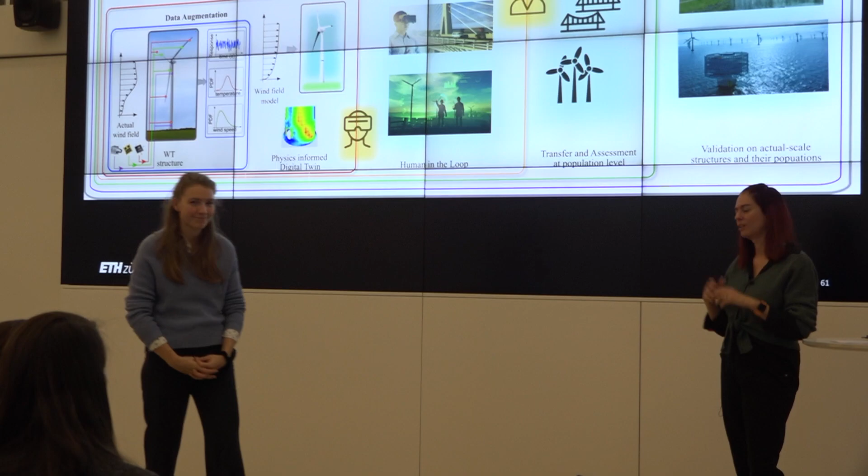So there's room for these ideas all through, in my opinion, from the design to the operation, even to the decommissioning of these systems.